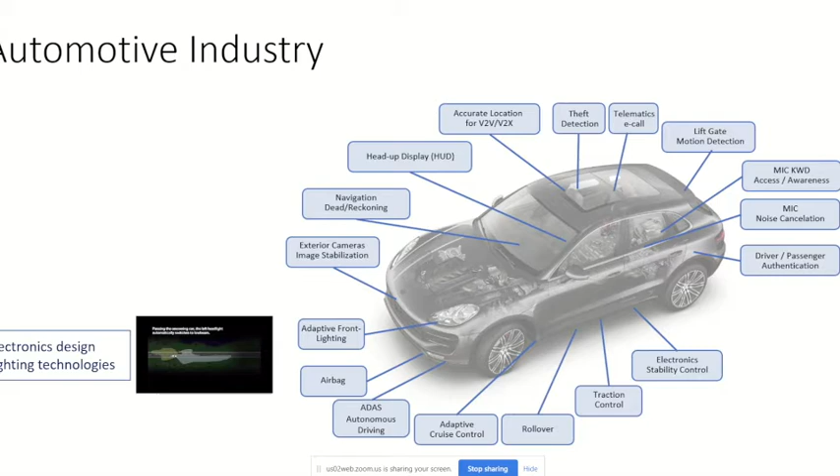It is related to safety. If you design the wrong information there, if the designed product has wrong inputs, wrong feedback, then you will have a wrong part and a wrong headlamp, and there will be an accident for sure.

Then let me go to any questions in this. I just chose a handful of features. My idea here is not to show the features. My idea here is to explain what is behind that feature and where we are placed in. That is where my idea here is.

Features - once you start going on YouTube, you will find a lot of features and you will get everything known. By the time you buy the car, you will know everything. I only got to know most of the features only when I bought my car last one year back. So it is normal, but we need to understand what is behind it, what is needed to get that particular feature. That is where my interest here is.

So do you know this HUD, heads up display? It is basically a simple transparent display directly on the wiper windshield, where the driver need not move his eyes away from the road. Isn't it interesting? So for that, it is simple. It's already an existing product. Maybe improvements are needed.

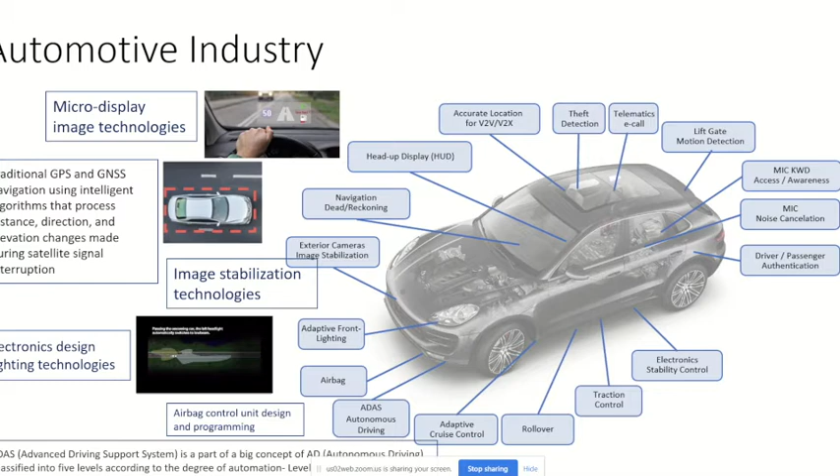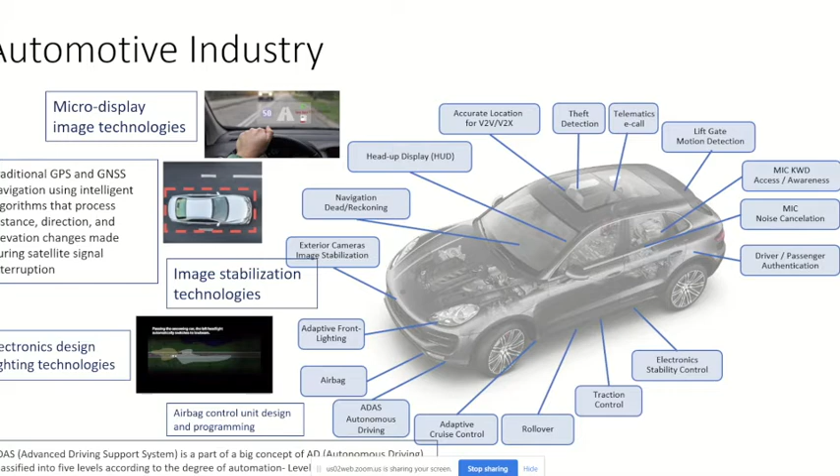Coming to autonomous driving, nowadays cars are moving from manual driving to autonomous driving. So this also needs a lot of algorithms, programming, and PCBA development inside, and gadget development inside. All these are needed for developing this particular technology.

Coming to the other side, accurate V2V, V2X. Basically V2V means vehicle to vehicle, vehicle to everything. Everything means even pedestrians, even pedestrian roads, even the crossings. This is all accurate decision making. So basically what is happening here is data collection and analysis.

Then coming to lift gate motion detection, basically sensor and actuation technologies. I don't want to go into details here, I just want to give you an idea of where we are placed for these particular things.

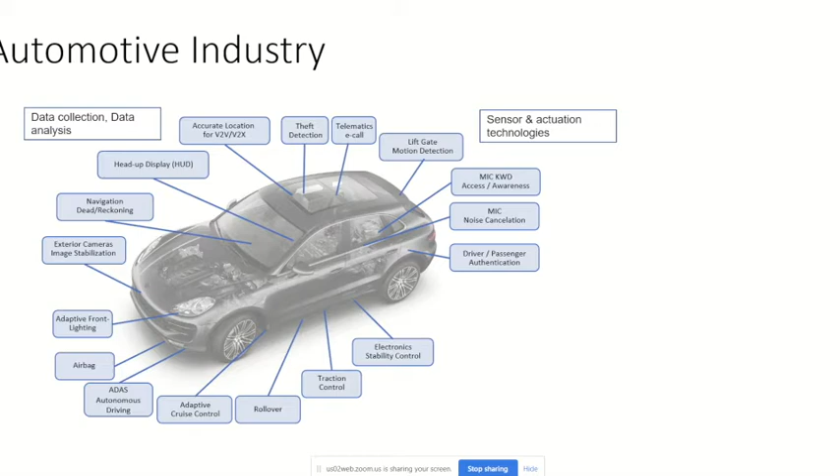Coming to noise cancellation, for mic noise cancellation, noise cancellation microphones are built to pick up your voice while ignoring the background. Because if you are giving a voice command to Siri or Google hands free, during that time, if there is noise in between your voice and your commands, there will be a problem, and it may not understand correctly, it may understand wrongly, and lead to an accident again. So this is important, despite increasing your convenience, it also needs to be safe. That is the reason these noise cancellation devices are being used.

Driver and passenger authentication is most recent. We know biometric technology is being used in all companies globally now. So it is being implemented in cars also, which is helping to reduce crime or theft detection and theft control. And electronic stability control.

This is for computer controlled braking of individual wheels, so that the driver maintains control of the car. Whenever there is a sudden stoppage of the car, all wheels should stop at the same time. If only front wheels or one side's wheels start braking and the other side doesn't, it will start skidding, or sometimes it will fly off. So in order to have stability for that vehicle, this technology is used, and it is mostly programming and complete electronic design, along with mechanical systems in place.

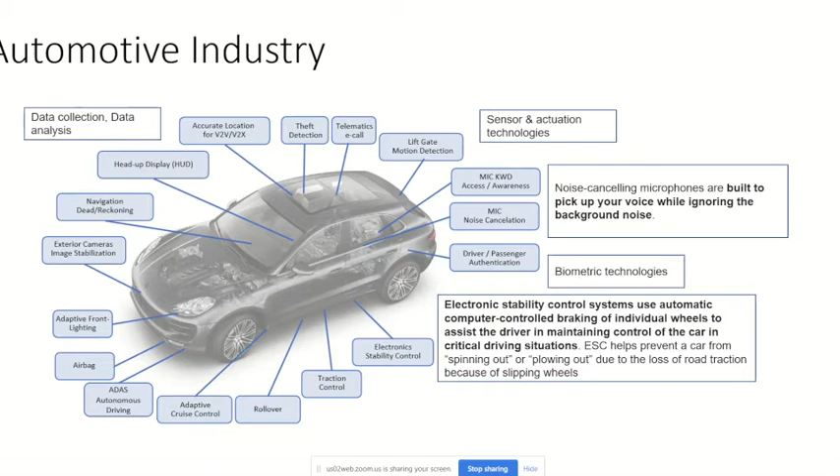Similarly, traction control is a similar technology, it detects if a loss of traction occurs among the car wheels. If there is some difference between each car wheel, some position difference, or one of the car wheels is malfunctioning, it will sense that and have control over the complete car, helping the driver maintain control.

And similarly, rollover, and adaptive cruise control. Adaptive cruise control I personally experienced when I was in Shenzhen, I went on a trial ride with a Tesla car. Tesla has an automatic cruise control, where the driver can start cruise and the car will go continuously on the road. If there is a minimum gap with another car in front, there is no risk at all, the car continues.

If somebody is changing lanes from left to right, the distance between the front car and our car reduces. During that time, the speed has to reduce, otherwise we will directly hit the front car. That is known as adaptive cruise control, and this needs a lot of algorithms and learning. Artificial intelligence is needed in this, it's like learning from experience for that particular AI system.

So these are the overall features for this automotive industry, where you all have opportunities to get into this and work in it. Any questions on this, everybody?

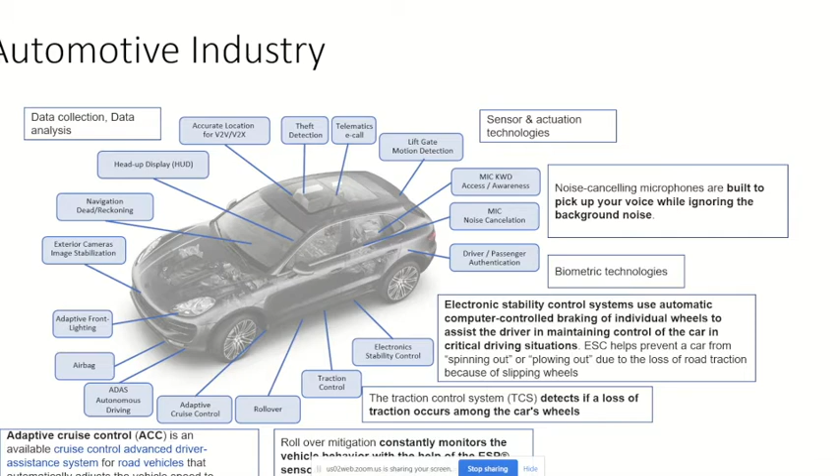So, electric vehicle industry - can somebody explain what is an electric vehicle? I'm sure many people are inquisitive and have gone through YouTube trying to understand how electric vehicles work. I would like to have somebody come onto the stage and give a 1 minute explanation about electric vehicles from the students.

It is basically nothing but a vehicle driven by an electric motor. Earlier we were driving the car by engine, right? We are taking the engine out and keeping the motor there, and also designing the other electric vehicle architecture according to that - we need a controller, a DC-DC converter, a battery, a battery management system. Whatever features we talked about in automobiles right now are the same, they will never change, they'll all be there. In addition to that, we are taking the engine off and keeping the motor in, and connecting all other related connections and systems to make sure the car will run with electric power, not fuel power.

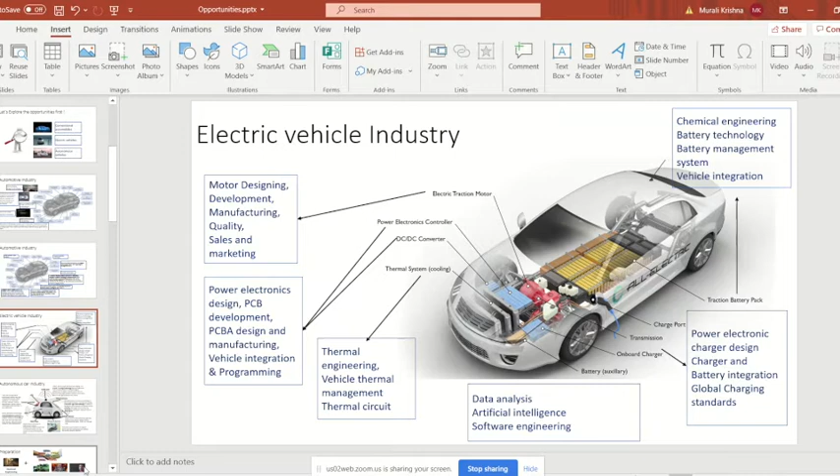Now let me go into a little more detail. Electric motor is very much important - we are taking the engine off and keeping the motor, and we have a power electronic controller which will actually power the motor, and a DC to DC converter, like 48 volt to 12 volt, for powering all 12 volt accessories in the car. Thermal system for cooling is very much important for batteries and the motor, because temperatures will be very high when the vehicle is running, and it needs to be controlled, otherwise there will be a blast. Coming to the traction battery pack, it is actually below our seats.

Generally most of the cars keep it below the seats only, that's the best place to keep it. Then there's the charging port, and the transmission onboard charger where we have a charger inside.

There are two ways of charging. One is the charging port from public charging - like when there's no petrol or diesel, we go to the petrol bunk and get it refilled. Similarly, we're now getting the concept of public charging booths where you go and plug in, wait for 10-15 minutes, get charged to 60%, and just go. This is the culture we are going to get soon.

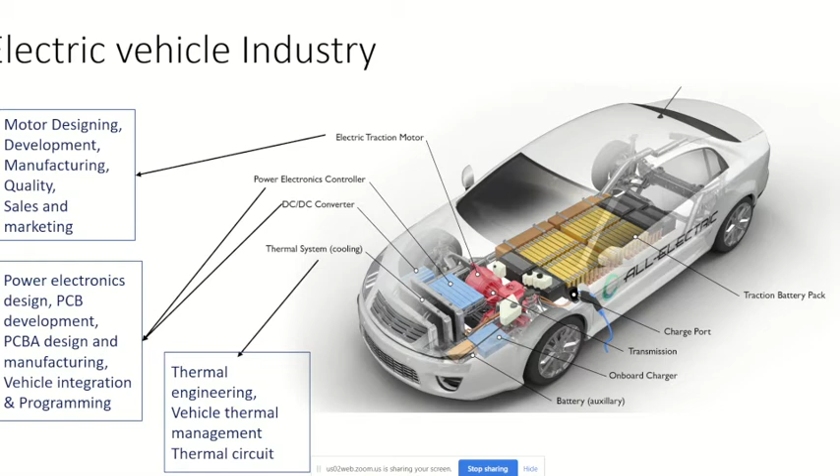So thermodynamics, despite we just say we will study it for passing the exam, it is really very, very important. You will know thermal engineering. You need not be an expert in it as an electrical engineer, but you should know the basics of it - how the thermal energy transforms, how the temperature transforms all over the body of the car or vehicle. This is just an overview to give you an idea about it.

And then data analysis. Why am I keeping data analysis here? If you see Tesla cars, or for example Mahindra Electric cars, where I was working earlier in Bangalore - I was working in Mahindra Electric - we used to have complete data whenever the car is moving. We have some 10 to 20 cars, 30 cars running on the road. What we used to do is get the data to our server and analyze how the driver is driving.

How much speed generally it is driving, how many times he is charging the car, and within how many kilometers the charge is getting discharged. That kind of multiple data we used to get via server, save in our server, and analyze it. And not just me, but it is like a team - as our team we used to do that.

So how does it help? It helps in understanding the road conditions, customer expectations, vehicle conditions, vehicle current situation, and improve the vehicle to the next level. Right? Are we clear? So this is where this data analysis comes in. Data analysis is not much into electrical, but still you should know how to do this data analysis.

So most probably this will be coming into, I don't know, maybe IT or computer science related activity. And coming to battery - basically it comes with chemical engineering, battery technology, battery management system, and vehicle integration. You know what battery management system is?

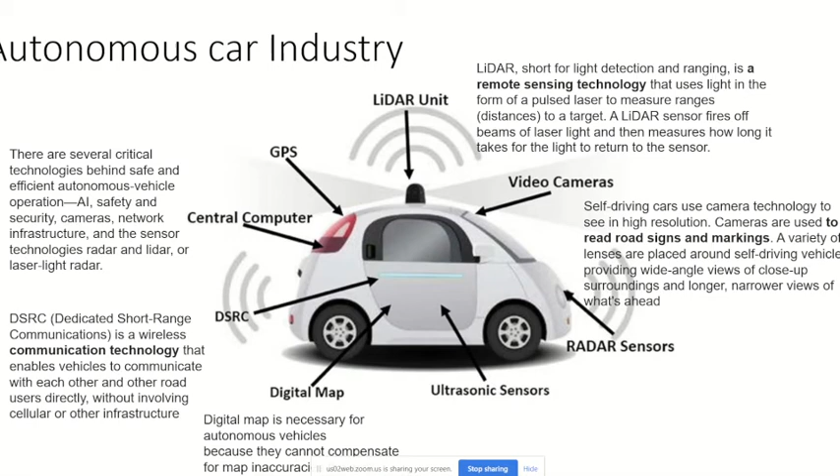Similarly, video cameras need to be very high HD cameras to make sure there's a clear understanding of the situation and where the car is. Radar sensors and ultrasonic sensors are similar - they also help the vehicle park automatically. This is one more feature I saw in the Tesla car during a trial run - automatic parking. It automatically parks - I just keep the car somewhere, say go park it, and it goes back to its position and parks.

And of course nowadays there are more new technologies coming, like wireless charging, which I didn't mention much here. The charging will be below the car, wireless, like how an iPhone gets charged. Similarly, the car will be above the charging point and will start charging automatically during the night time.

See how the technologies are evolving. 20 years back, we only knew cars, not even electric cars or electric bikes. But now we are into autonomous vehicles - we are going more automated. Are we clear? I hope the points are interesting and a good learning.

Okay, so now I go back to the preparation. Till now we are exploring, but now what we have to do is prepare for it. As a student, this is the time you have where you can explore as much as possible and target your goal, where to go, what do I want to become in the next 5, 10, 15, 20 years. You should have a dream, and for that dream you should start preparation from today onwards. You cannot say I'll go back to the company and start learning there. No, companies don't have time nowadays to teach anybody. They only have lots of projects to work on because of current technology evolution and competition. So coming to preparation, what do you think now?

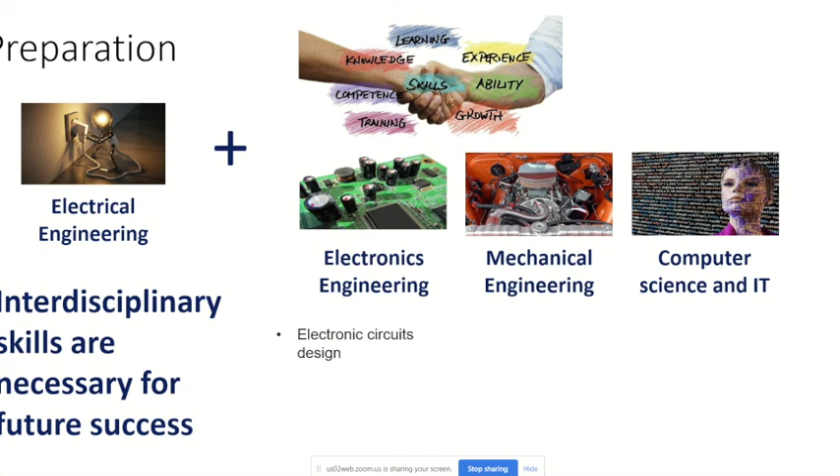So am I making any sense to you all on this topic? I just gave you an overview of what is actually needed in this interdisciplinary approach. Right now we can talk specifically, but I'm sure this will help you people everywhere. So for preparation, I would like you all to start working individually on learning in these particular areas: artificial intelligence and machine learning, electrical vehicle engineering, automobile electronics. Self-learning is very important for this.

Can you see this? Please try to learn this from YouTube, you have a lot of resources nowadays. I suggest going through some courses, like Udemy courses, which are very cheap, some 500 rupees, but you get very good resources. Similarly there are YouTube resources where you can find the right people to get resources. Only thing is, what I am going to give you is the direction where to go. I will be sending this presentation, so I need not go into detail on this topic. The main important thing is I suggest you start working on your own startups, that is important.

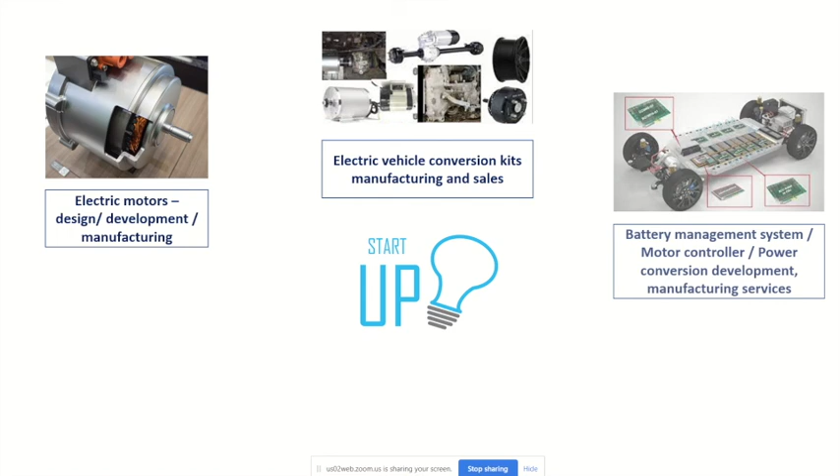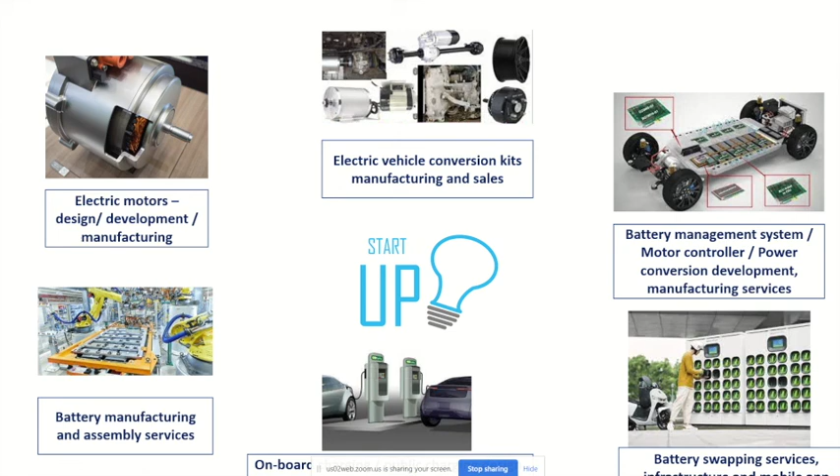So concentrate on electric motors, electric vehicle conversion kits, battery management, battery manufacturing, onboard charging and off-board charging, and battery swapping services. These are only some portion of the whole opportunities I just told you about. There are a lot more opportunities, and you can take one keyword and start exploring it. You will have a lot of information, you will learn a lot in terms of that.

Basically what I wanted to tell is, everybody should not stop learning, we should learn continuously. Even now, I learn. Everybody learns, as we learn we keep learning, we stay young. If we stop learning, we will become old. So this is just my thought to everybody. I hope this session has been useful and interesting. Any further questions, you can ask, or we can stop.